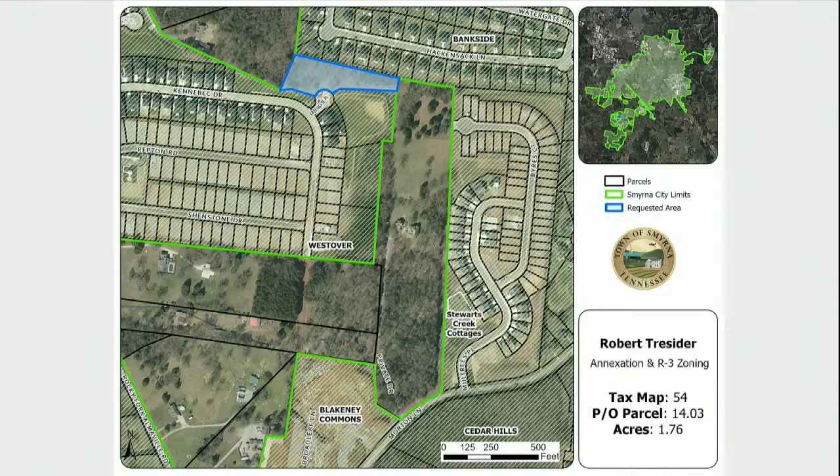We actually do have at least a concept plan for that, shown on this drawing here. There's just a couple of lots off the end of that cul-de-sac that would be proposed if this is annexed. Surrounding zoning is a mix of, within town, there's a couple of PRDs around it, the Westover PRD and Bankside, and then RM in Rutherford County, which is the remainder of this property, as well as the property to the west.

Land use plan would support medium-density, single-family in this area. There are no roads on the major thoroughfare plan that are affected by this request.

There is existing water mains within, that CUD has existing water mains there in the Green Gate Place, that little cul-de-sac, as well as sewer. So the infrastructure is already there to serve these two lots. So I believe that's all that I've got.

Questions for Kevin on this request?

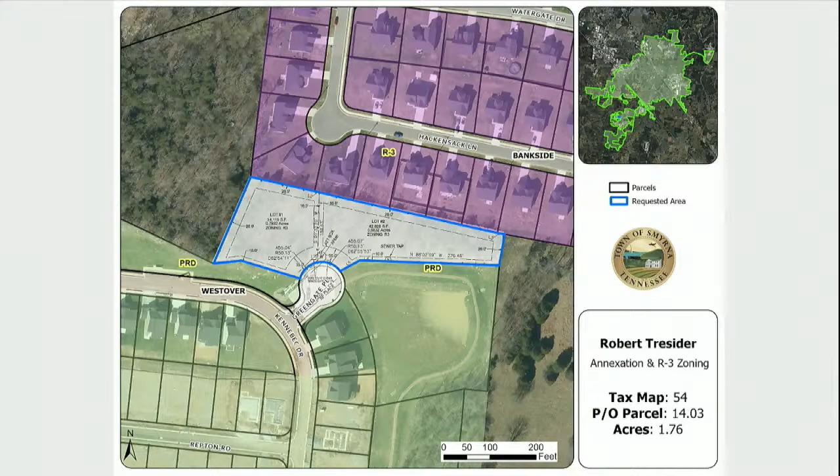Is there a reason they're requesting the R3 versus a PRD? It looks like they're connecting into an existing neighborhood that was built under the same PRD. If they choose to build in this location, should that not maintain the same requirements that the rest of the neighborhood did? I don't know. I know that the property owner worked with the developers of that project with regards to the sewer taps and everything in this area. So I don't know if there was discussions, if there's going to be some sort of private restrictions or something to reflect that they meet the Westover requirements or not.

Typically a PRD has a lot of other requirements, open space requirements and things like that, and this is such a small development with two lots. To me, it didn't make a lot of sense to do a PRD for it. But the owner is here if you want to ask him, he might be able to answer that question.

It seems like the only real option there would be to modify the Westover PRD, which if Westover owners aren't willing to do, then... Yeah, they're a separate point, ownership completely separate from this, yeah.

I guess I'm just not seeing a problem with this because these are two substantial lots here, and from an impact to the surrounding area, it's less of an impact from what I'm seeing here. But it does back up to R3 as well, so yeah, it's PRD on one side, but R3 on the other, and we've seen that in several locations, so I don't think it's inconsistent with surrounding zoning.

Other questions or comments? Hearing none, I'll entertain a motion. Move to approve with staff comments. I have a motion to approve with staff comments. Do I have a second? Second. Motion and a second. Any further discussion?

There are several comments that have been addressed. Comment 12 regarding the drainage structures and easements or common areas has been addressed and can be removed. Comment 13, there were some easements that needed to be labeled and dimensioned, as well as those off-site sewer easements; those have all been shown now and can be removed. We asked them to show the sizes of the water mains; that's been done. Comment 14, and number 15, they have shown the max overall height now with a note on the plat, so that can be removed.

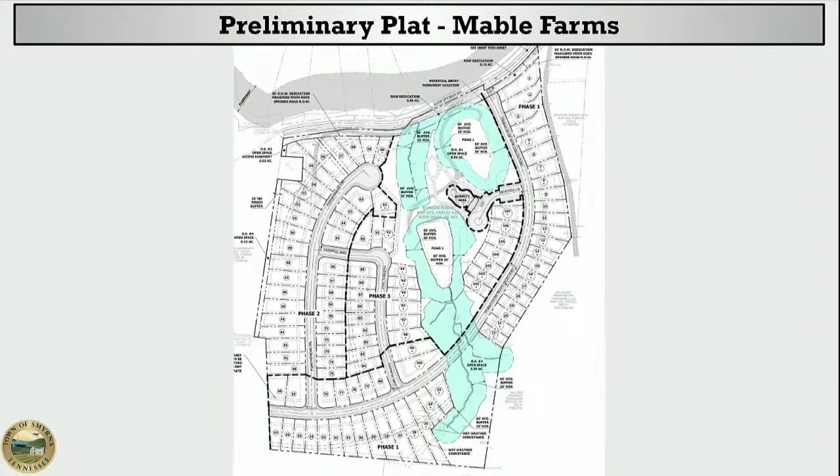Comment 16 would need to remain. It was one of our standard comments that got moved down the list a little bit there. The sewer main extension to that western property line may need to be moved or relocated due to some topography in that area where it's shown, so they're going to have to work through it with our utilities department to make sure they get that at the right location. So we would want to keep that comment.

Comment number 17 has been addressed regarding some additional dimensions that were needed on some easements that weren't exactly on or adjacent to property lines.

Number 18 regarding the front setback lines has been addressed and can be removed. And number 19 regarding the sewer extension at the end of the road at lots 38 and 37 has been addressed and can be removed.

Comment 20 we still need to keep. There's a crosswalk that needs to be shown crossing Triana Lane where it comes off of Rock Springs Road. And comments 21 and 22 came from CUD, and those two would need to remain.

One other comment I want to add: some of the easements are labeled as PUDE, public utility and drainage easements. Some of them have an A in there, which I assume means access. They need to all be labeled just public utility and drainage easements. There's no access easements needed on any of these, so they need to change the labeling.

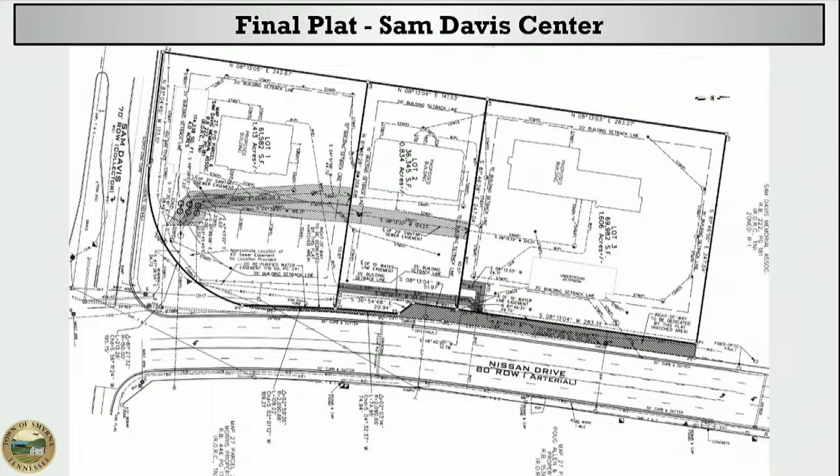Kevin, maybe minor, but what is the correct spelling of the owner's name? It's Pogue, P-O-G-U-E.

Other questions or comments? Do I have a motion?

Move to approve with staff comments. I have a motion to approve with staff comments from Amy. Do I have a second? Second. Motion and a second. Further discussion?

All those in favor of approving this motion, please signify by saying aye. Aye. Opposed? Motion is approved. We are now on to site plans.

The first one is 7 Brew, southwest corner of President's Place and Isabella Lane. Owner, developer, Who Brew LLC, and it's my understanding that we've also had a request to defer for 1 month, yes.

Any questions on this deferral request? Motion to defer. Second. So we have a motion and a second to defer for 1 month. Do I have any further discussion on that? All those in favor of this deferral, please signify by saying aye. Aye. Opposed? This motion is deferred and approved.

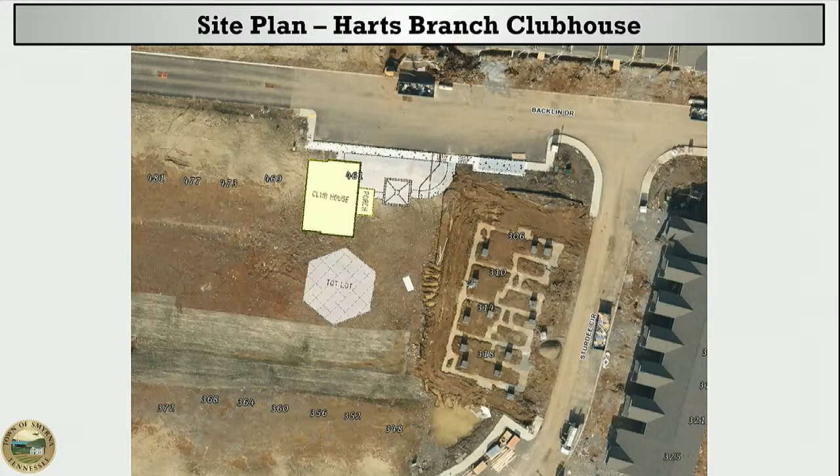The building is to be finished with a mixture of brick and fiber cement board, which is consistent with the other townhomes within this development. Vehicular use area for the entire site is going to be over 4 acres, and that would require 0.41 acres of landscaping. They're showing 0.55 acres, so they're meeting that requirement. The landscape plan does show a variety of shrubbery and trees planted at the base of the proposed clubhouse building.

Architectural elevations submitted show a mixture of brick, glass glazing, and fiber cement siding. As presented, the materials shown for the clubhouse do match the materials for the townhomes within the development, so it would be consistent.

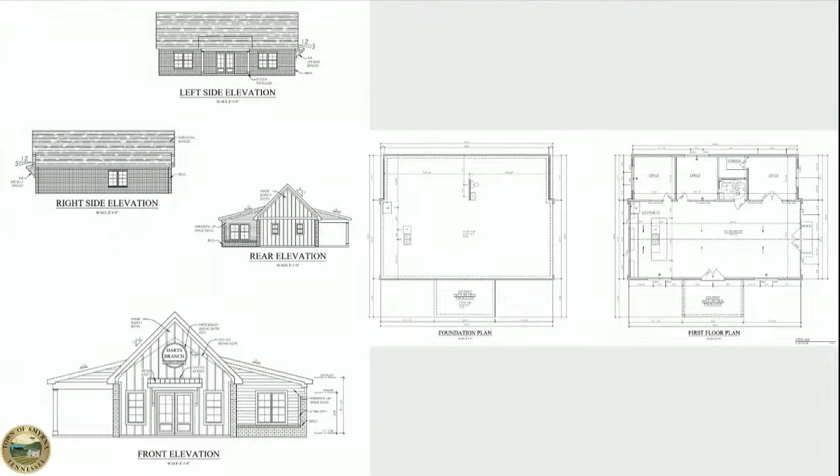Standard comments 1 through 6 would all remain at this time. Comment number 4 regarding the fire flow, talked to the fire department about that today and got that sorted out. Should be 1,500 gallons per minute at 20 psi, which should be sufficient enough for the site to meet. So staff would recommend approval with those comments. Okay, any questions for Mitchell on this?

Hearing none, I'll entertain a motion. I have a motion to approve with staff comments. Do I have a second? Motion and a second to approve with staff comments. Any further discussion?

All those in favor of approving this site plan, please signify by saying aye. Aye. Opposed? Site plan is approved.

The next item is Janet Ibrahim, Rocky Fork Road, owner, developer, Janet Ibrahim. And I also understand that we have a motion to defer here. That is correct. Have we looked at this previously?

You looked at the zoning previously, yes. This is the site plan. Did we not have some type of concept or whatnot? We did, we had a concept and everything. This was the actual site plan and construction plans for the project. We had to move the kiosk and all that stuff. Yeah, they added some parking. There were some requirements on the architecture because of the overlay.

Yeah, I was confused when I saw it too. Was this the one where we had the two homes that were facing? Yeah, we did rotate to face Rocky Fork Road. So are we anticipating that's going to change at all? No, this is just a delay in the site plan process. I just want to make sure they're not getting ready to change anything on the layouts or anything.

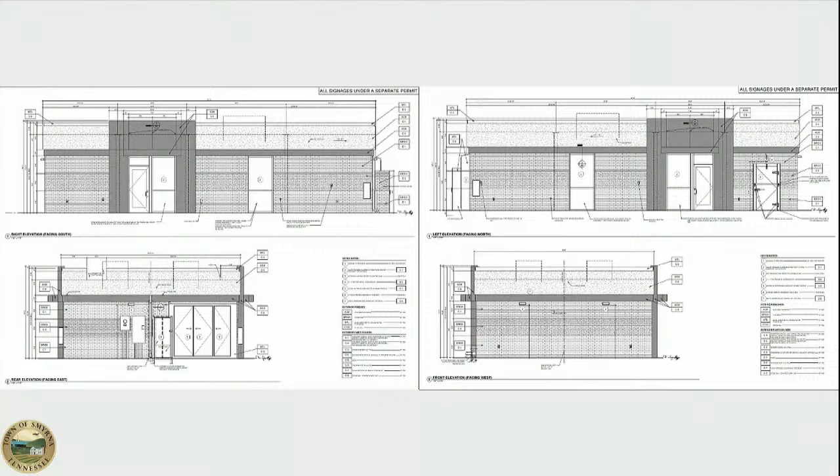We did receive architectural elevations yesterday on these, so more than we received previously. The architectural elevations show a mix of brick, glass glazing, and architectural composite metal panels, or ACM panels. The percentages have not been shown for the breakdown of each wall face and the entire building itself, so we can't verify whether it meets design review as far as the percentages are concerned. Based on the look of it, the metal is probably going to be exceeding what our ordinance allows for, but we just need those percentages shown to verify whether it does or does not meet our requirements.

Standard comments 1 through 7, with the exception of 6, will all remain. Comment 6 is not applicable in this case since they're not adding any kind of stormwater measures to the site.

Staff comment 1: they did submit a water load sheet requirement for our utilities department to review, so that comment can be removed. Comment 2 goes back to the architectural elevations; all we need them to do is submit percentages for the breakdown on each wall face and for the building in its entirety. Number 3: they were originally showing the dumpster finished with CMU block, but they're now showing brick to match the building, so comment number 3 can be removed.

Comment number 4 is more of a standard comment. If the fuel tanks are to be relocated, it's going to require a permit from the state for that.

Comments 5, 6, 8, and 9 are all going to be utilities department comments, more minor comments than anything else. We're going to leave those for the utilities department to review at a later date when they have their separate review process.

Number 7, the grease trap comment has been addressed with our utilities department, so that comment can be removed.

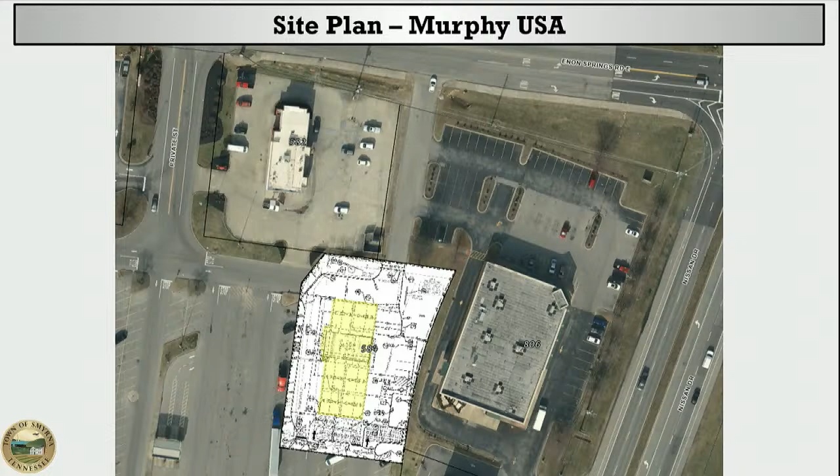Yeah, the truck route that they're showing, that's just for the fuel delivery, right? This isn't going to have diesel? I believe it's showing, currently I don't know if it's for the fire truck or for the delivery truck, it could be one or the other. But yeah, I don't think it's intended to be a fuel station for tractor trailers or vendors. They just showed this truck route on here, and I wanted to make sure that was just for the delivery truck. Yeah, clearly looks like a semi. Yeah, it's not intended to be like a trucking fueling station, no.

The structure here that's currently here versus what's proposed, is that a tear down and a total rebuild? Yes. So we're not worried about what existing structure is in addition to an existing structure, this is totally a new structure within the canopy area? Yep.

There's nothing grandfathered since it's being torn down, correct? No, it's C2 zoning, that's exactly what I'm thinking. As far as that's concerned, the new building has to meet our new standards. Yeah, okay.

Okay, anything else for Mitchell on this? Do we need any kind of comments since you don't have the percentage? That's going to be covered in comment number 2. Revise that comment on our end to add the percentages so we can verify them, and if they don't meet the requirements, we'll make them fix it till they do. That'll be reviewed when they come and pull building permits. We'll take a look at that.

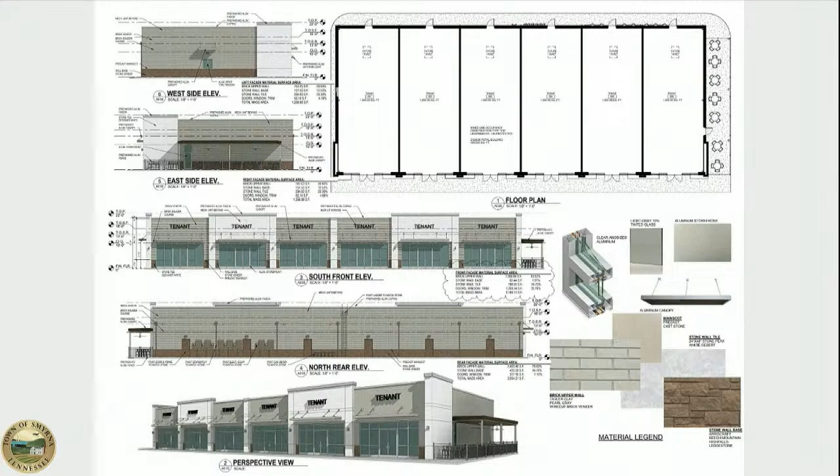Architectural elevations have been revised since packets went out, so it is still proposed to be finished with a mixture of brick, tile, and glass glazing. As presented now, the architect has revised the front elevations to meet our design review, so all of the wall faces do have a minimum of 75% primary materials. So the elevations are now cohesive with our design review requirements.

Standard comments 1 through 7 will remain at this time. Staff comment 1, the water load sheet requirement sizing - the applicant noted that this is going to be submitted after planning commission review, so comment number 1 will remain. Comment 2, to submit the final plat to be recorded prior to receiving building permits.

We do have a final plat submitted for the gas station. They have submitted their building permit for that. We're holding up their permit until the final plat gets recorded, but we do have that. There's a couple other items, as far as standard comment number 7 for the stormwater control measure maintenance agreement.

And then there's going to be an additional agreement for shared parking between the 2 lots. So until those fully get submitted, we're going to have the developer take those all at one time to be recorded, just so everything's together. So staff comment number 2 is going to remain at this time.

Comment 3 regarding the elevations that did not meet design review previously are now meeting design review, so that can be removed. Comment 4, the dumpster enclosure was either on the new future parcel line or slightly over the parcel line in the northwest corner. The applicant has shifted it over a bit towards the east, so it is now fully on this property, so comment number 4 can be removed.

Comments 5 through 7 are all CUD comments, since this does lie within CUD service area, so those comments will remain. Staff comments 3 and 4 can be removed, and the rest will remain. And with that, staff does recommend approval.

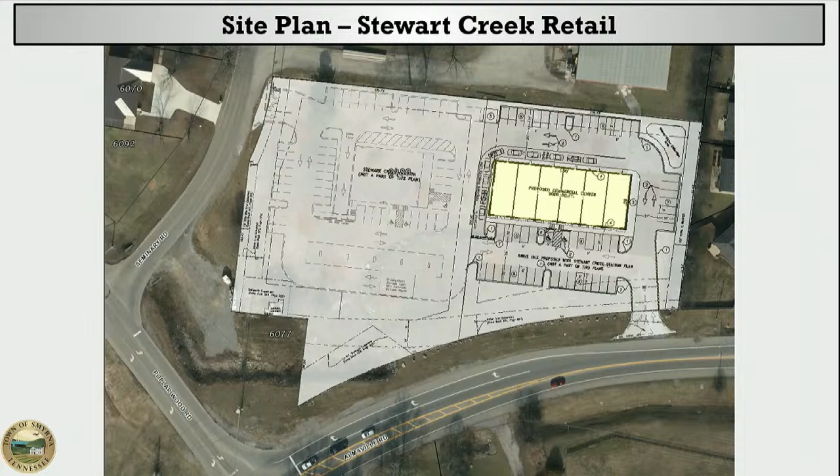Okay, and improvements to seminary, is that the other right lane you're talking about? No, there won't be any improvements, the lane is just the signalization, mainly timing. It'll be all new equipment in there. And then our project, or Tom Rose's Public Works project, will get that hooked up online into our traffic control center.

Charleston, did you say the right turn lane will stack all the way back before that entrance now? Yes sir. That was one of the discussions, that we were going to try to have the right turn lane into the business and then bring it back out. But TDOT said they wanted a continuous right turn lane from before the side entrance continuing on all the way down to the existing right turn to Poplar.

So in essence, it makes that right turn even safer. Yes, like I said, it makes it much longer too.

So not directly related, but there's no repaving or paving involved on Poplarwood and Seminary? No, specifically because recently on Poplarwood we had to go fix some corners and curves. That's what I was thinking, if they're going to be doing any lanes here, it might be a good opportunity to make sure those get addressed. But no, we're leaving the laneage, it's just the signal improvements and the timing.

And then bringing it in online, we can put in multiple phasing elements into the timing on the signal. So you can have a morning rush hour for school, then a regular, and then in the afternoon you can rephase those signals.